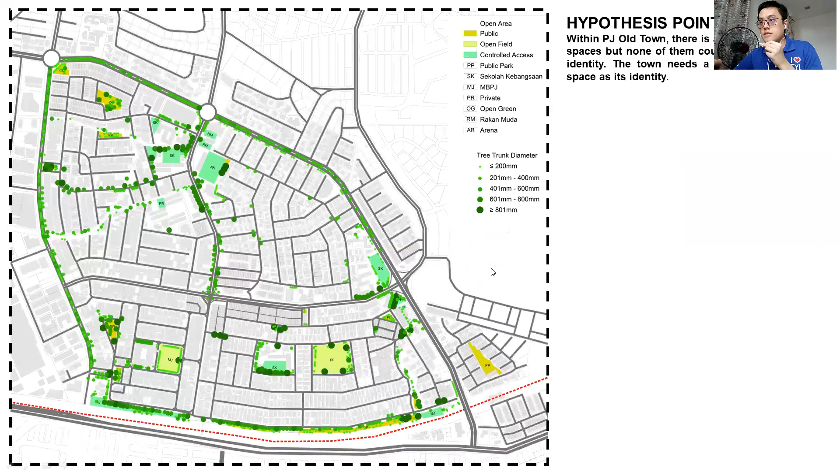This is PJ Old Town, and I'm showing you some of the informal open spaces within Old Town: a hockey field, open field, and school fields. All of these are informal open spaces, but they couldn't identify the town's identity.

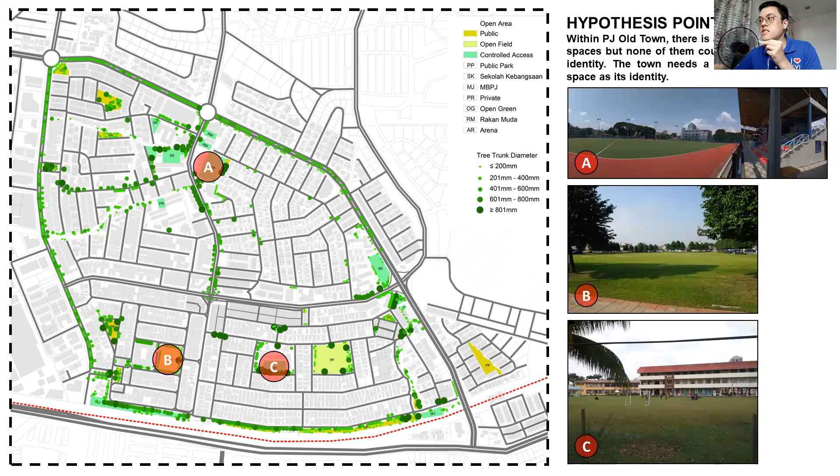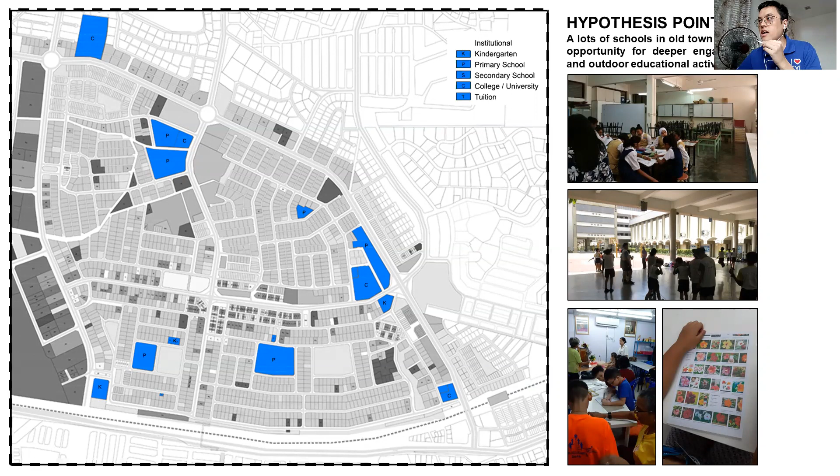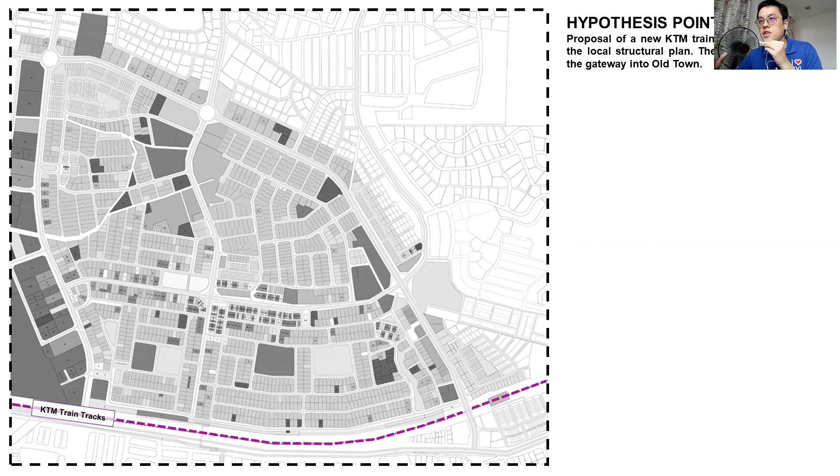Point number 3 is regarding transportation. The southern edge of Old Town is bounded by KTM train tracks, but the closest station, Jalan Templer station, is very far from the town center, and you need to illegally cross the tracks, taking 20 minutes to reach the town center.

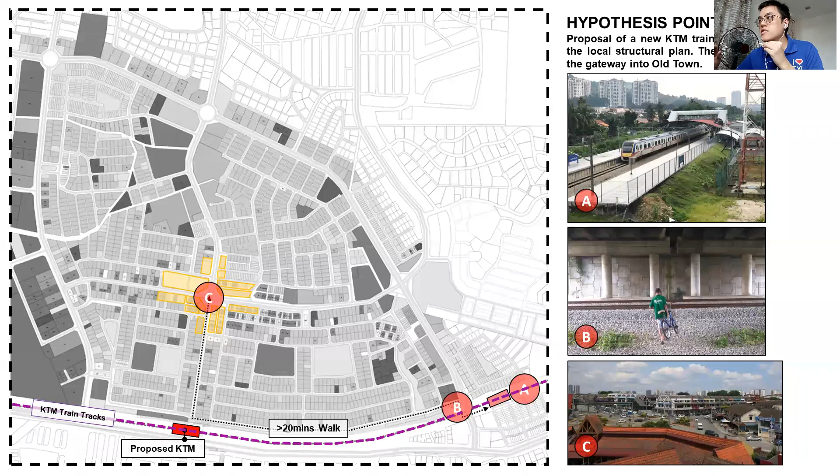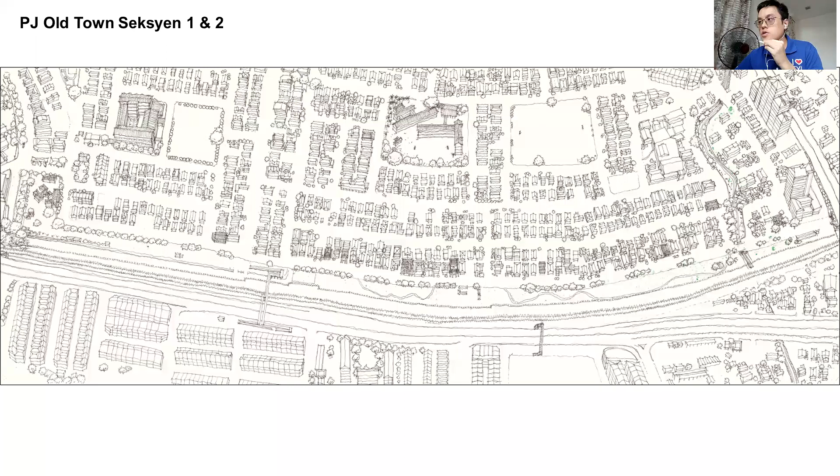That's why, in the local structural plan, there's already a KTM proposal at the center. I'm showing you sections 1 and 2 to illustrate my site, which includes educational institutions, open spaces, transportation, caring homes, and temples.

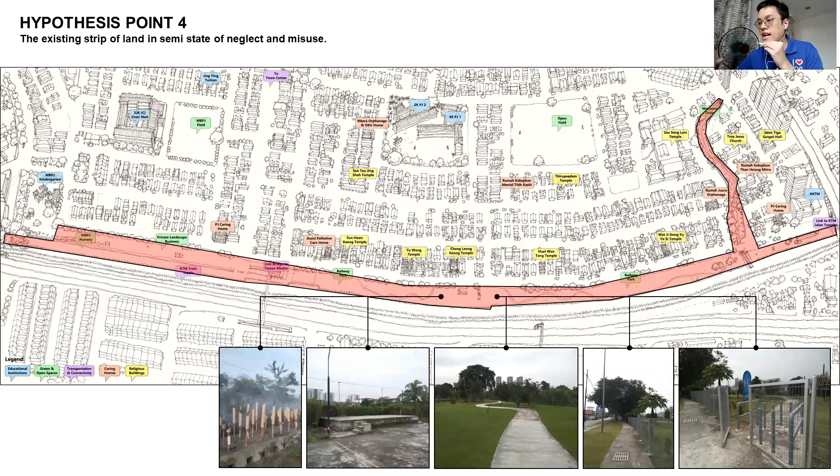Here are some photos of what's happening within the site. The site has been fenced up, and there is religious practice here, along with a minor ponding issue, a link bridge, a Rukun Tetangga cabin, and a monsoon drain. All of these photos show that the existing site is in terrible condition, in a semi-state of neglect and misuse.

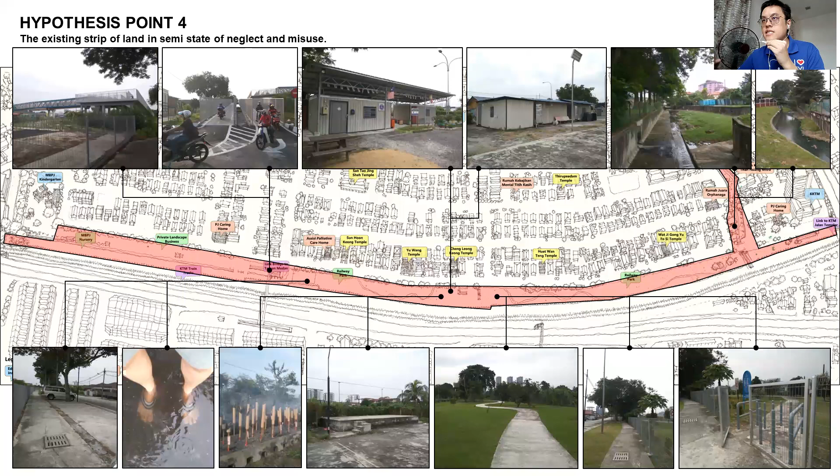All the points I mentioned earlier lead to my thesis proposal: an Old Town Botanic Gardens, a shared commons in service of health, education, transportation, outdoor activity, the immediate community, and neighborhood identity.

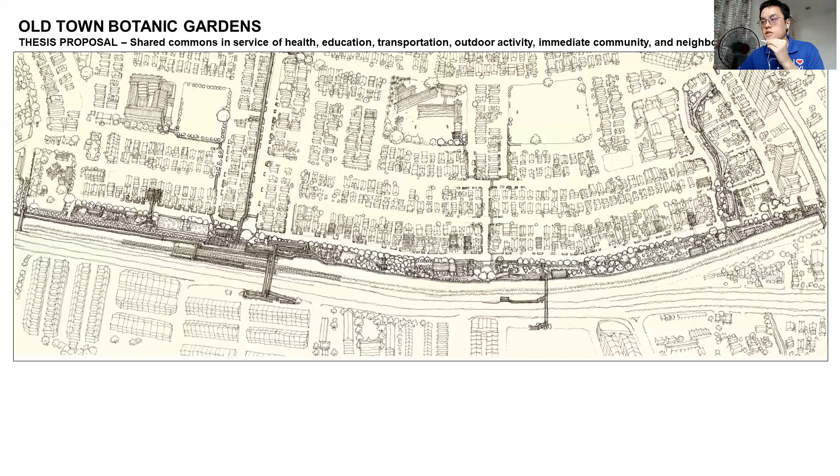Within the proposal, there are various anchor points such as the research center, KTM stations, link bridge, covered hall, community farm, and some supportive commercial activities.

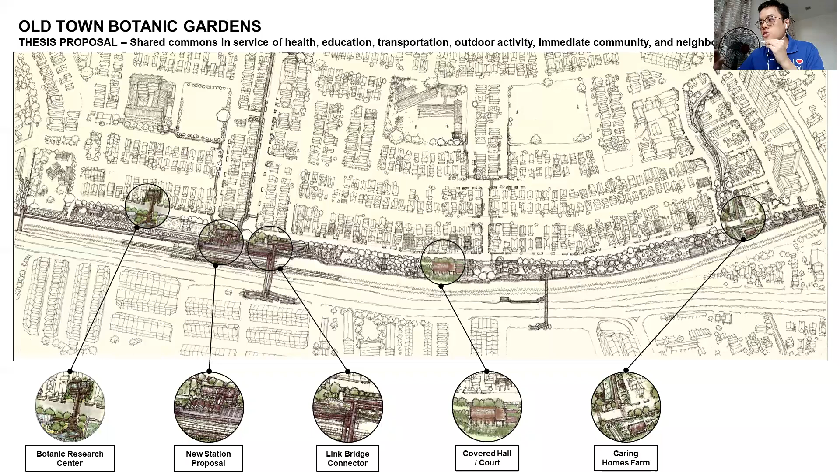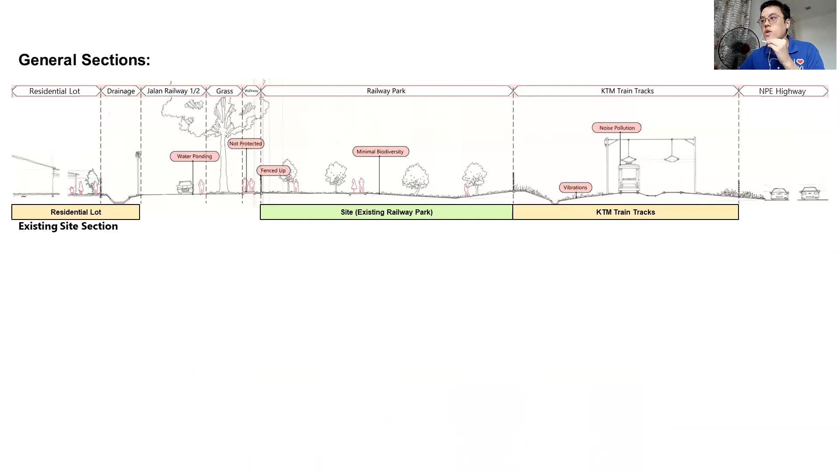Next, I'm showing you the existing site section. The site is currently a railway park, sandwiched between train tracks and a residential lot. And this is the proposed version.

The train tracks produce a lot of noise and vibration, so having gardens in between will become a buffer. This spine will become an edifice, which I'll explain in detail later.

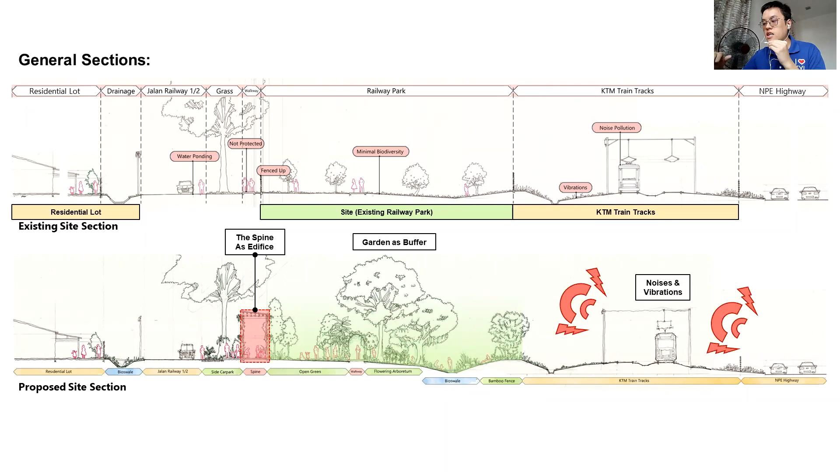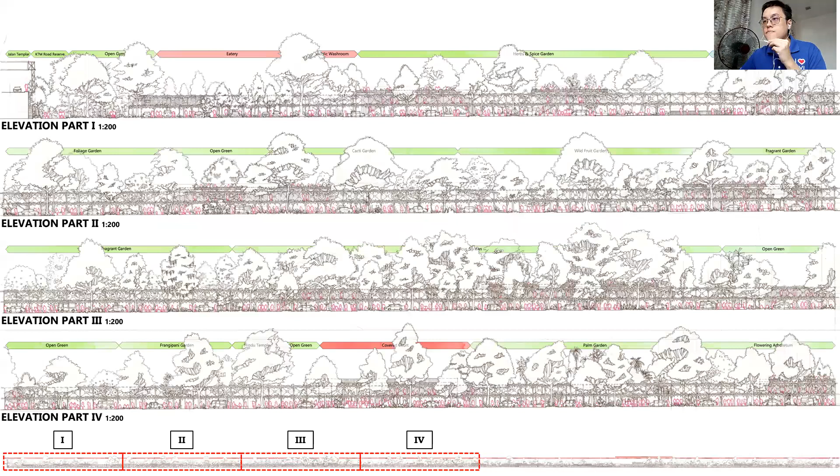This is the overall elevation, which is 1.4 kilometers in length. Taking a closer look, the elevation varies, but the arrays of trees remain the highest, marking the peak of the elevation, along with the other parts of the elevation.

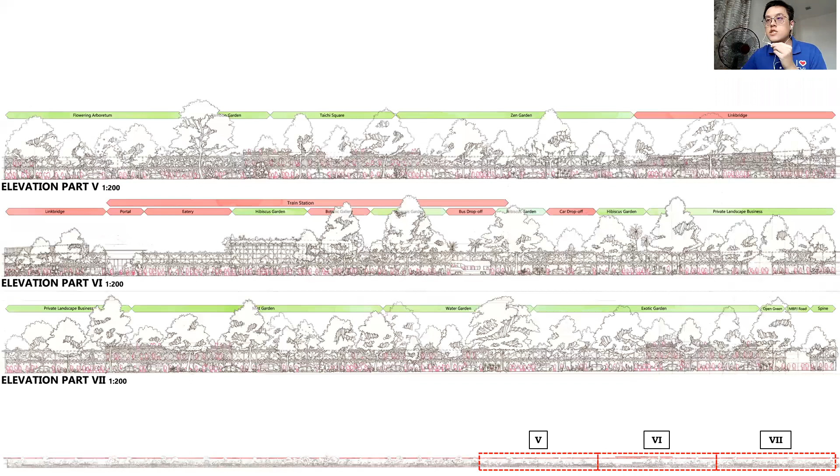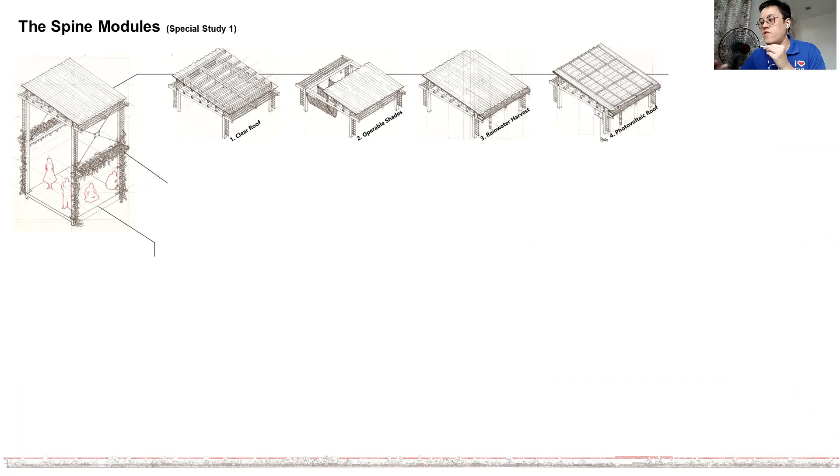Here comes my special study one: the spine modules. The roof can be broken down into 3 parts. First is the roof, with different designs for different functions, such as rainwater harvesting, a photovoltaic roof, and a flat roof.

The middle part is a steel structure that can convert into gardens, exercise equipment, rainwater tanks, and a raised walkway. On the ground level: reading pods, meditation pods, a bicycle station, open gym, vertical connection, and some small businesses, directory boards, washroom, or even botanic labs.

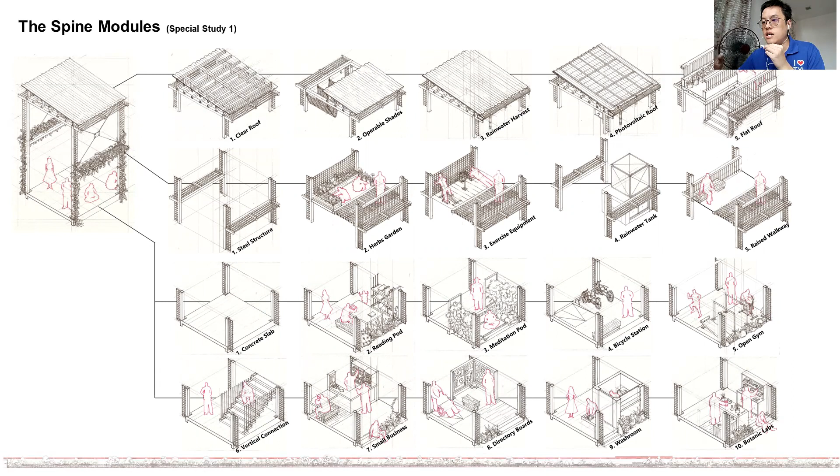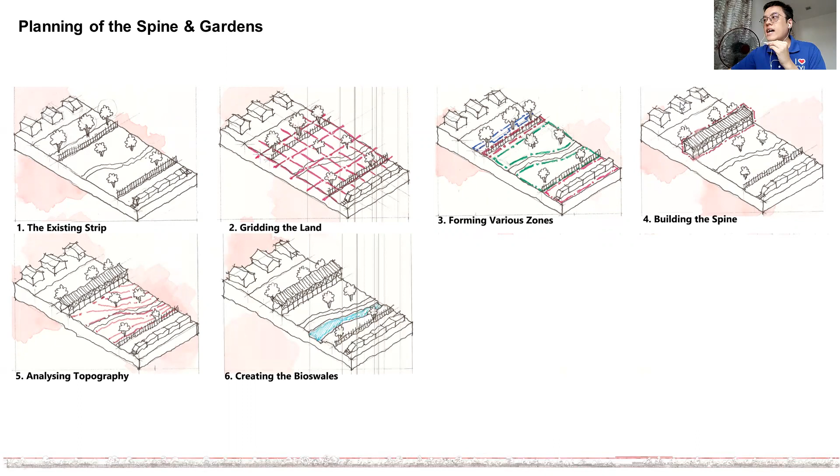Building out the spine starts from the existing strip of land, then gridding the land, zoning, and building up the spine, followed by analyzing the topography to demarcate the bioswales and planting the gardens, and finally it becomes a shared commons for all.

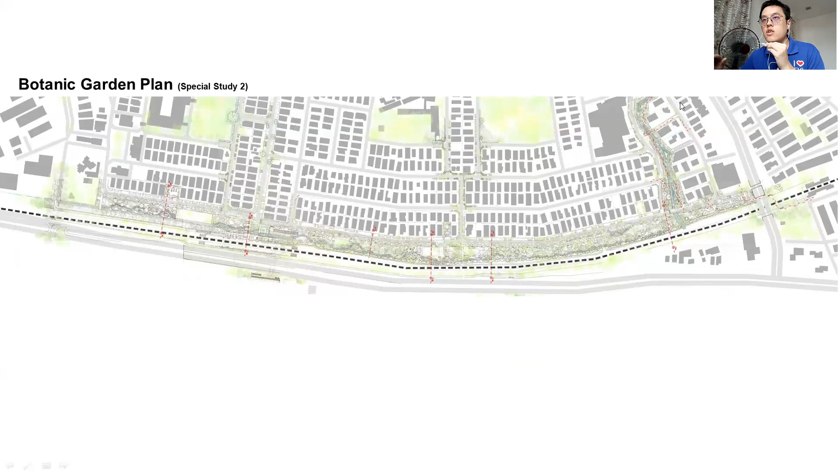I'm showing you the overall plans of the botanic gardens. There is a variety of garden happenings within the whole site, according to the topography and the immediate site context.

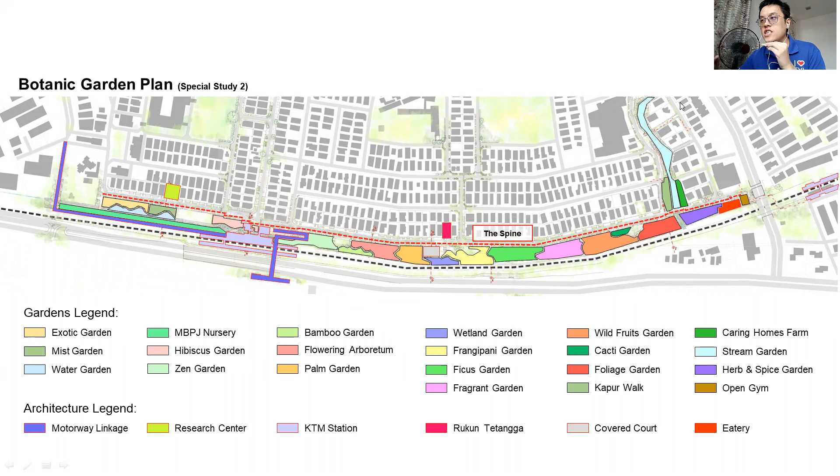The architectural interventions are sandwiched between the gardens. Taking a closer look, all the spaces are connected by the spine.

Taking a closer look into the site, part A is where the station and the research center are located. I'd also like to mention the new motorway linkage directly into Jalan Penchala to ease the traffic conflict at the Jalan Railway and Jalan Pasar junction.

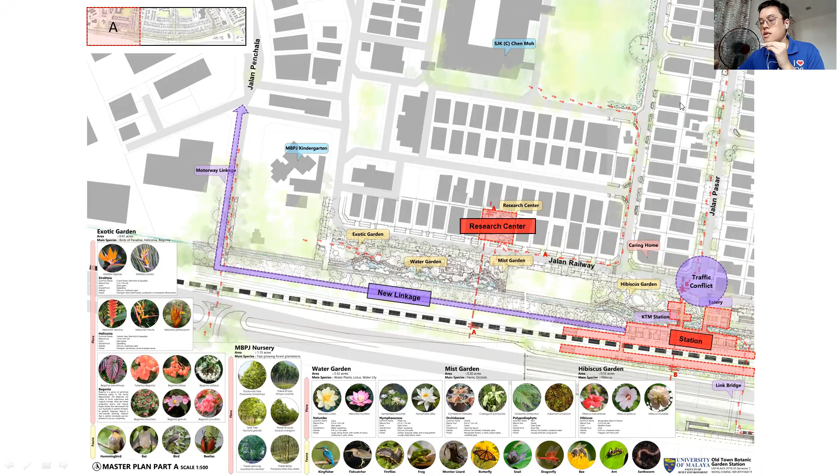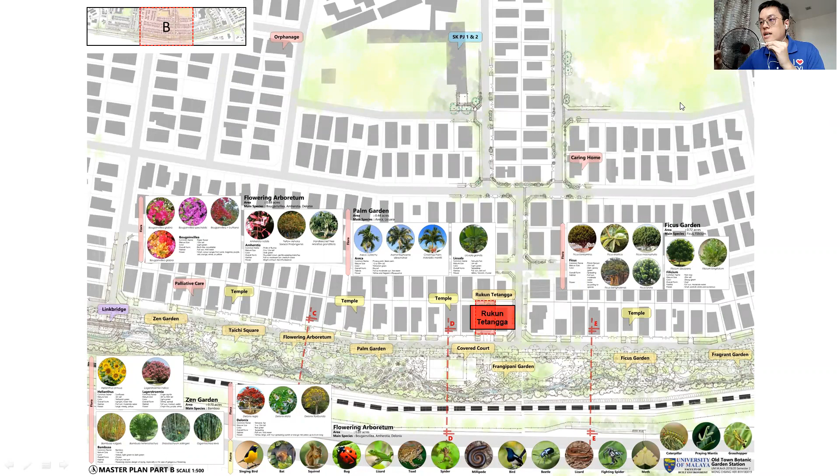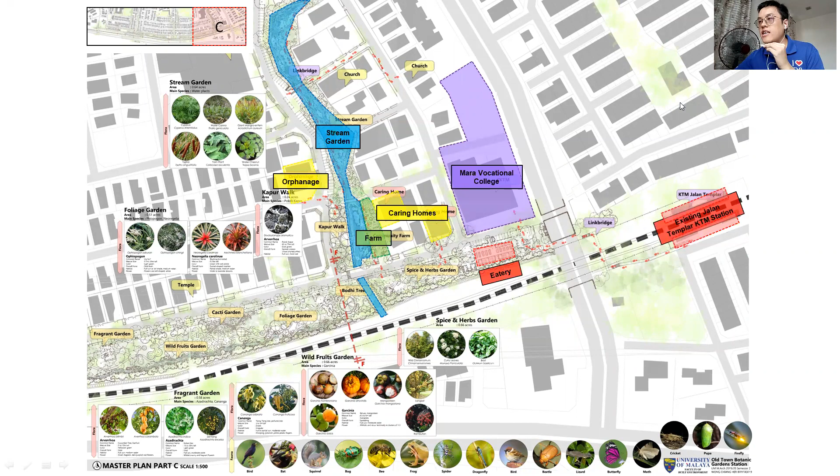Before the water is discharged into the Klang River, it will be filtered. There's also a farm street located here for the orphanage and caring homes, and an eatery for the Mara College, along with the existing temples in the Jalan Templer section. This section shows the largest existing tree on site, the Bodhi tree in the center.

Next, I will go into the station architecture. These are the sketches of some of the ideas I adopted when designing my stations. Next, I will go into the ground floor plan.

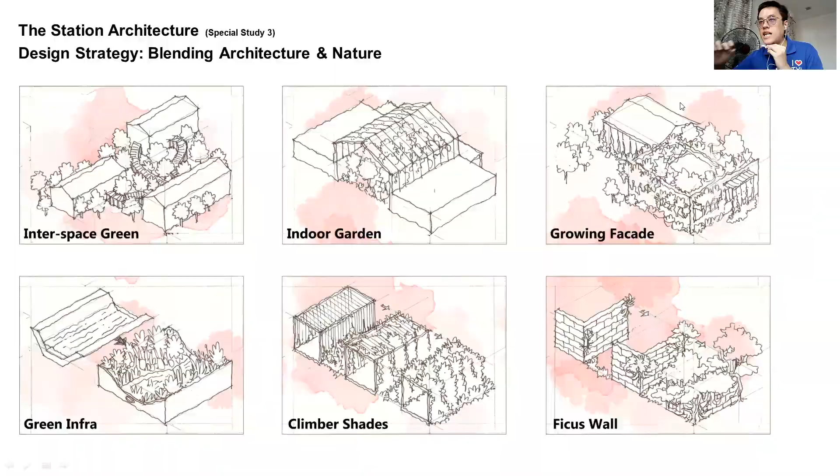What's happening here is I moved the ticketing area out from the station into the garden. So when you are buying a ticket, you will be buying it inside a garden, feeling like you are within a forest, hearing the sound of water and insects. I've also introduced indoor gardens to form a continuous experience of green.

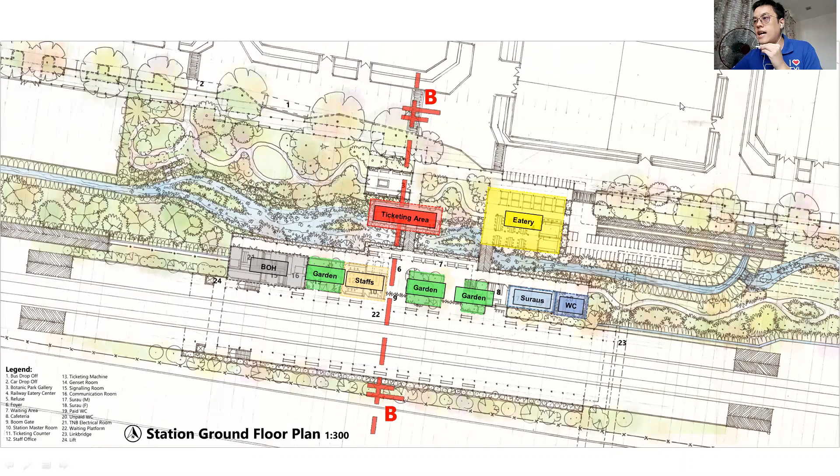Either you are dropped off from the bus station or you are on board from the trains. These are the staff area, an eatery by the roadside, back of house, and some supportive spaces. Now I'm showing you the first floor plan.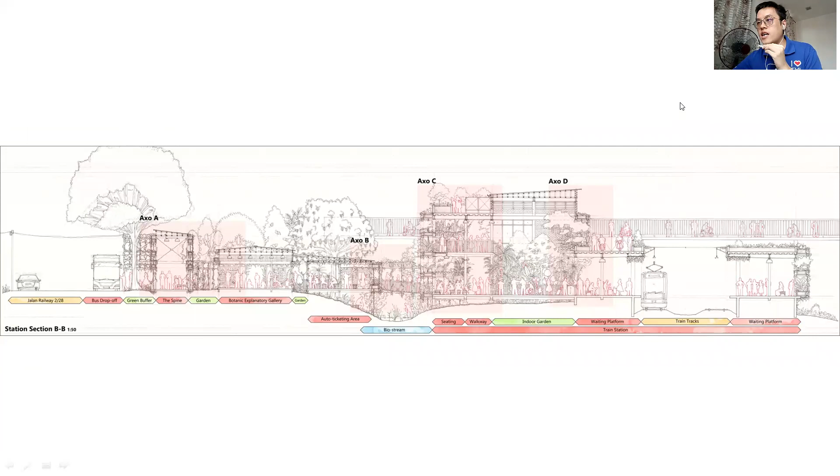Taking a closer look, part A starts with Jalan Railway, followed by the bus drop off. We go through a green buffer, enter the spine and a garden, then a gallery sandwiched between the greens, followed by the auto ticketing area.

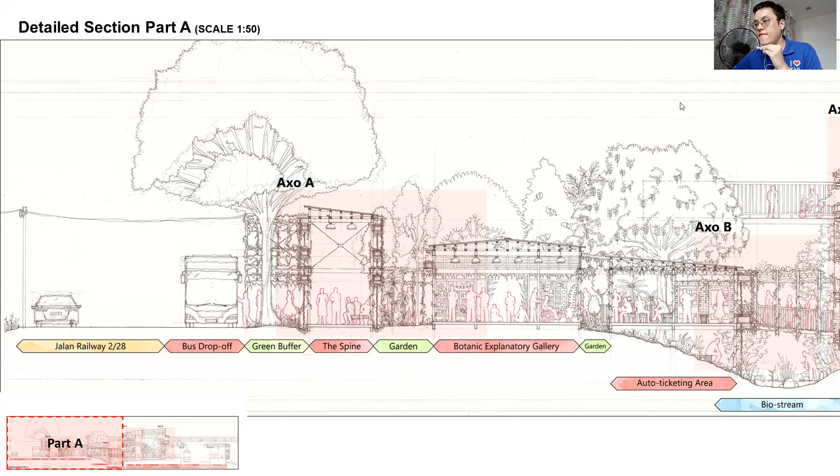And there's a biostream. After you go through the biostream, through a link bridge above, you will reach the station. In the station, there are sitting areas, walkways, indoor gardens, and you will reach the waiting platforms.

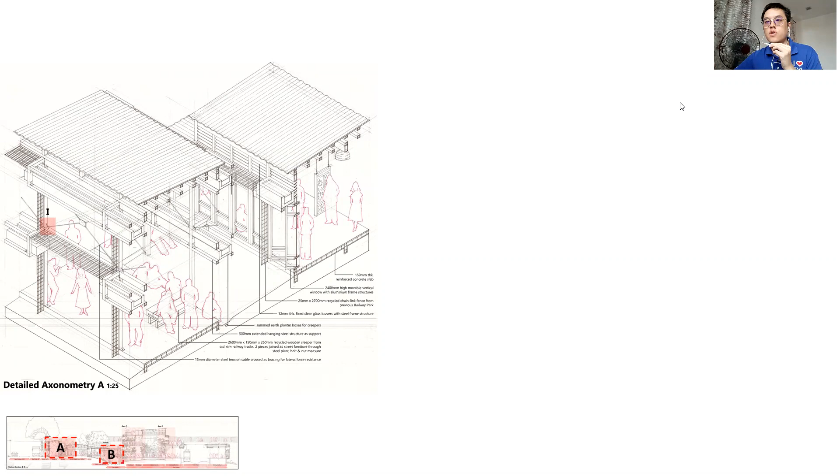Next I'm showing you the axonometry. Axonometry A shows the cut through of the spine and the gallery. B shows the auto ticketing area and the link bridge.

These are the details: the spine joint, the chain link ceiling details, and the steel cable joint.

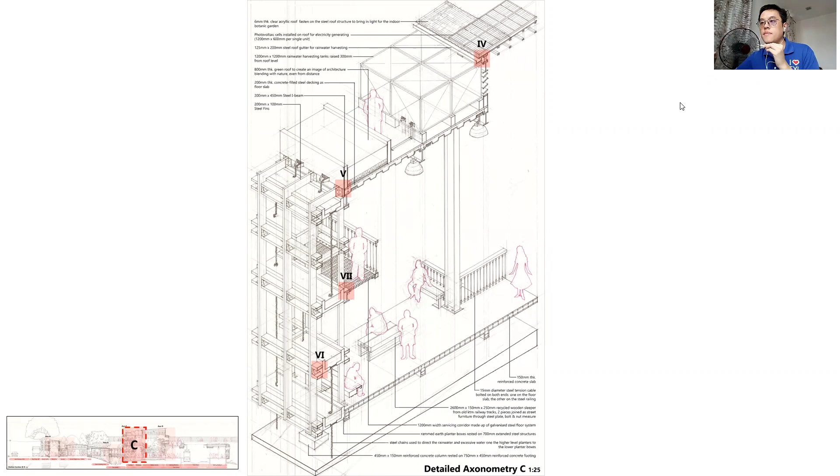Next, axonometry C shows the cut off of the main facade of the station and details like the roof gutter, green roof, and planter frame supported by the steel structure, along with the galvanized steel floor. Lastly, axonometry D shows the acrylic roof, shuttle window, concrete joint, and the recycled sleeper seat.

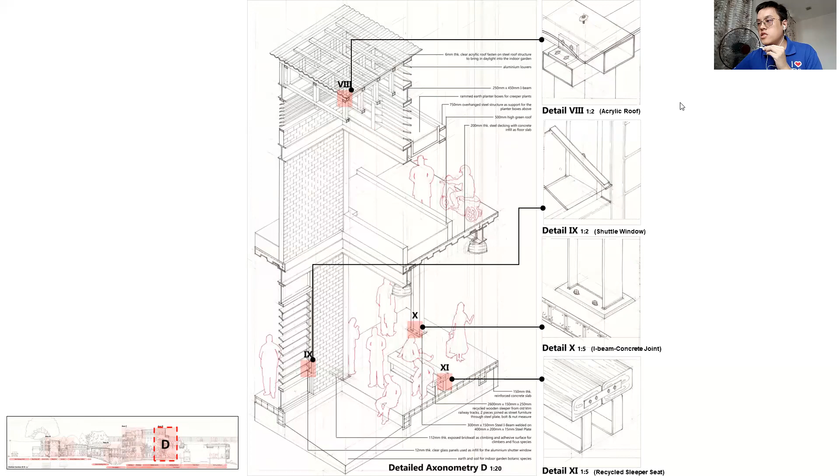Yes, so I will end my slide here. Thank you for listening. Thanks.

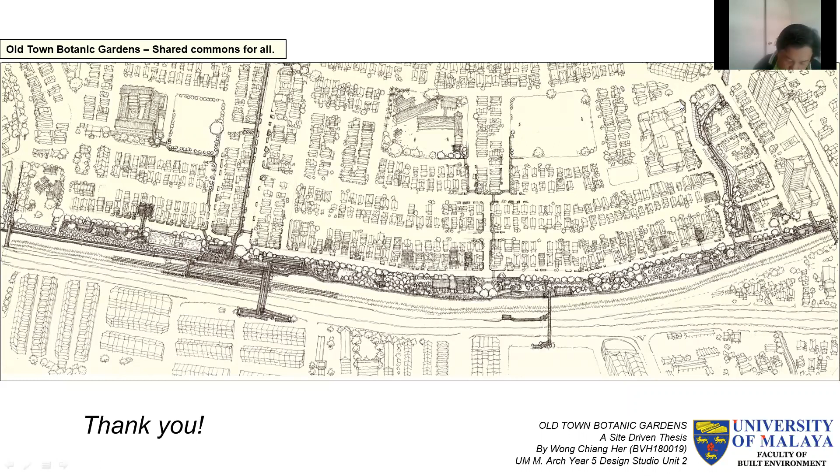I think the progress is where we can see the results of how the whole scheme comes together well. Despite being the smallest in architectural elements, there is a high degree of complexity in the thinking at the detail level, how a single module could morph itself into various aspects relating to the immediate adjacency of the site. The train station has seized the unique quality of the site to capitalize on the experience, how nature comes in, and the exterior actually becomes part of the interior. I have not much to say, but I think to congratulate you on a very successful endeavor.

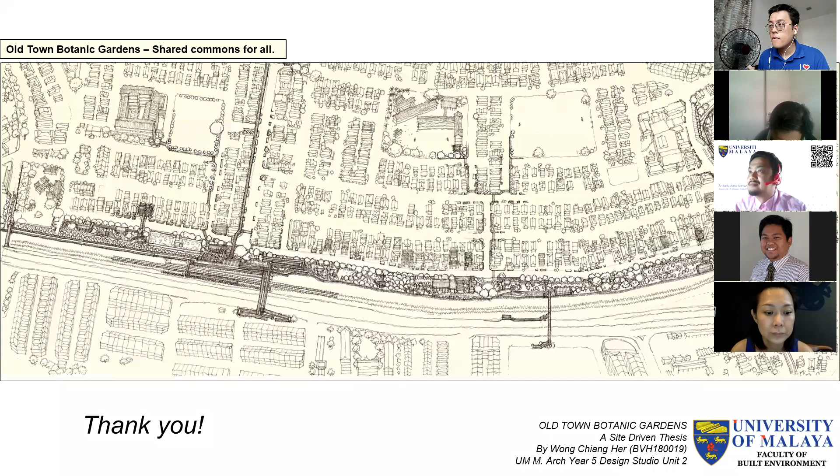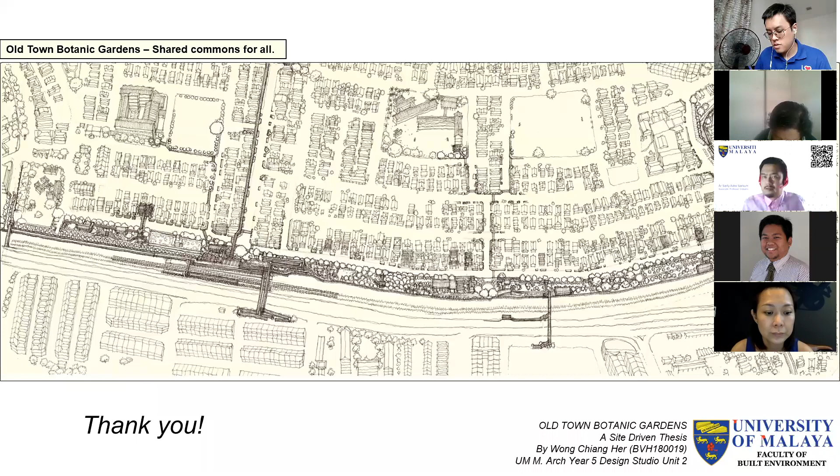Hi Chiang, I just wish, just a suggestion, that perhaps your architectural building could be a bit more bigger, in the sense that this has been quite a trend. This station is also being used to help communities around the area, so they can rent some of the spaces to sell stuff, kind of a small economy where they can generate their own income.

That's number one. Number two, I'm not quite clear on how the traffic flows during peak hours in and around the ground floor, especially the part facing your landscape area. But overall I'm okay with that.

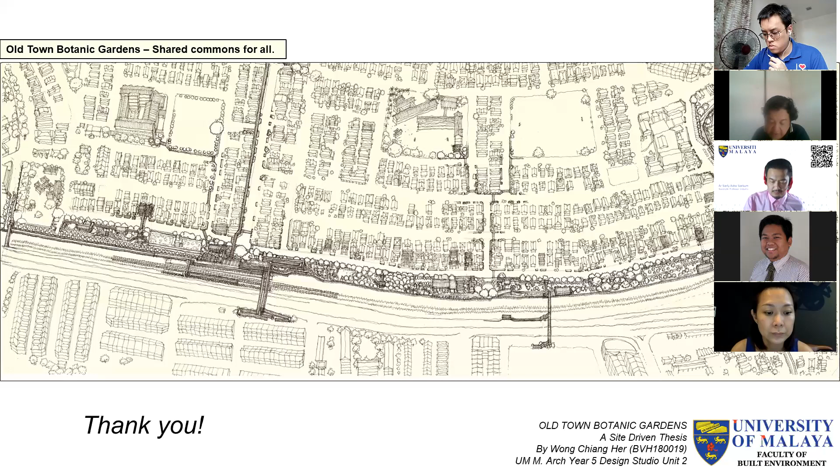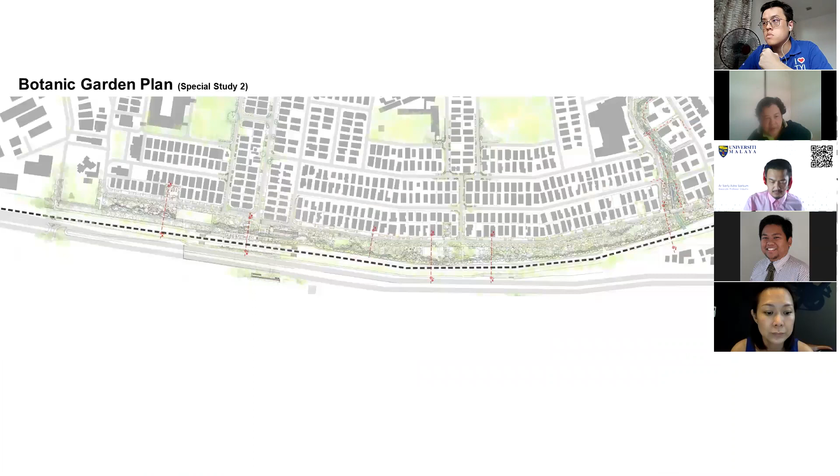Thank you, Sarly. We have about 10 minutes for Chiang to explain, in particular the point Chu Ping mentioned about whether there are night activities, opportunities for multiple use, and regarding the kiosks you mentioned, and the other question regarding Dr. Asrul's suggestion that the railway station could be bigger and have some rental space. But I thought you actually have some commercial and rental space based on what you studied earlier, more horizontally located across.

There are a lot of comments regarding the joints and the construction, not only construction and material but also landscaping, and the idea that your construction and material is to be sympathetic to plants. So maybe you can start replying to those two questions, or ask the external critics to clarify further what they want to ask you.

Go ahead. Actually, for Chu Ping's comment, I haven't done that part yet, but I will expand the exploration for the coming portfolio review.

Thank you, Chu Ping. And for Dr. Asrul's comment, it's actually like the spine - you can see here there's really some options for small businesses. The 3 meter spine, 1.5 meters of it, can actually convert into small businesses, so you can have random spots along the spine, maybe like ice kacang stores or air tebu stores or something like that.

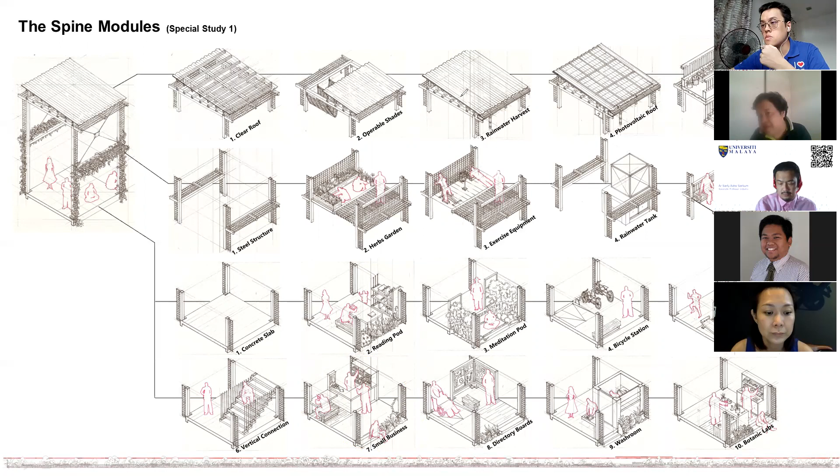But what Dr. Asrul said is that maybe you should also explain what the commercial activities are here, and how you can see these commercial activities - maybe the stalls, the nasi lemak makcik near the corner where she sells to the motorcyclists - where is that particular makcik located, and what stalls are you trying to do specifically?

Those are some of the things that maybe you well and good could just even go to Putrajaya and have a look at what Dr. Asrul is saying regarding the context of Putrajaya and the context of your Petaling Jaya Old Town. What is the context in terms of the old person, whether they can actually also sell their stuff away, because you have that link now between the railway station to the center of town. Maybe some of the congestion in that road could go and be selling their wares, the fruit stall and so on that we know of that street. So maybe you can have a look at that.

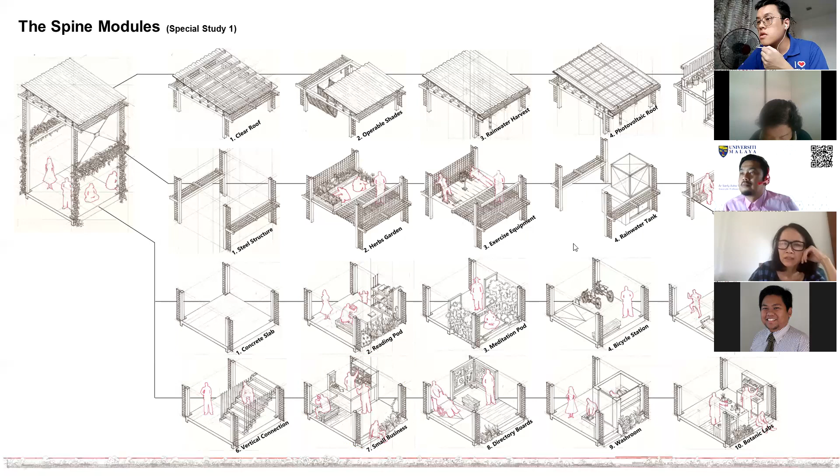All right, and Chiang He, would you like to explain? Do you have anything to explain regarding these topics that we've discussed towards the end? You have a commercial space that you included near the linkway, the last time, the makcik, where the makcik sell nasi lemak. I think it's not explained in that sense. It's near the KTM station, right?

Yeah, so here you can see that the yellow color, which is the eatery, is actually with the intention of keeping it by the roadside. Because when I went to the site, I saw that there's already an existing business there, makcik selling nasi lemak and mee goreng by the roadside. So that's why I put it by the roadside, with motorcycle parking beside it, so that when there are a lot of motors coming from the Taman Merah area from the south, on their way to work, they can buy their breakfast from the makcik there. So I intended to maintain the existing business, so it's happening here.

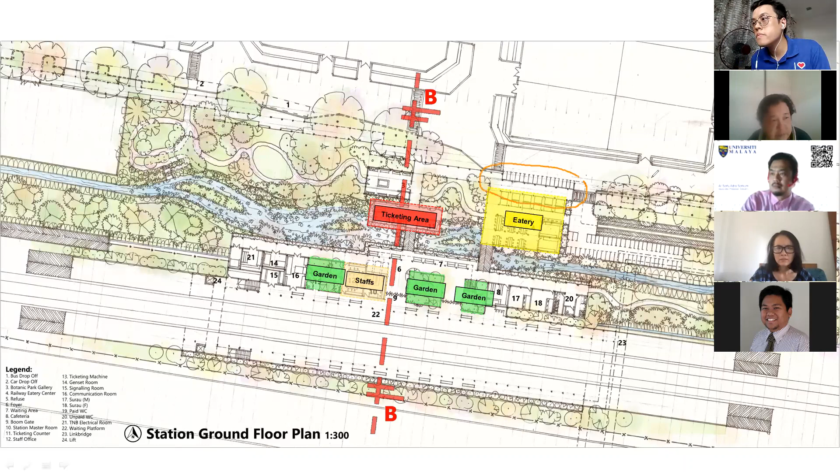Okay, thank you Chiang He. Maybe, to please the department's requirement, you could emphasize more on structure and services details, and possibly even detail out your eatery as well as your railway station further in terms of the roof and how you have rainwater downpipe, and how maybe your rainwater could you calculate that could actually help assist with making your botanic garden, the relationship between the built environment and the nature environment, how water collected on the roof could go into watering the plants. Maybe there are some details in terms of structure and services, and the construction and material could be much more accentuated in terms of solutions regarding human and nature together. So that would be much more impactful regarding what you could provide for in the final boards.

So any other points that the external critic would like to remind Chiang He so that he will be more focused for his portfolio review? Maybe just a minor point.

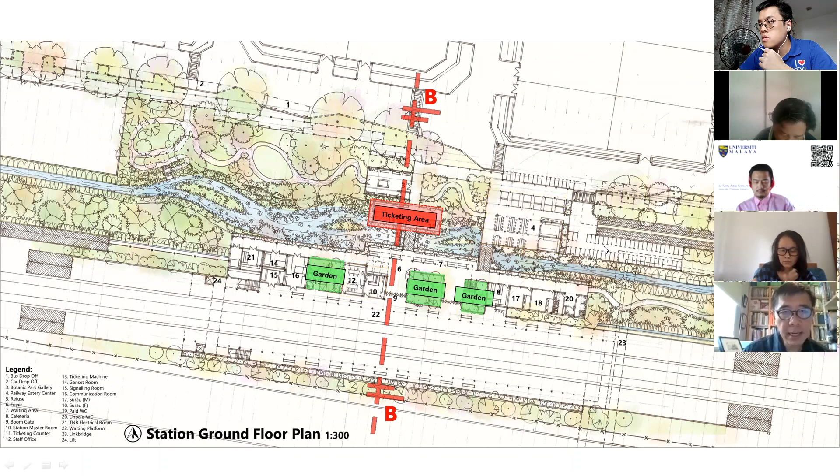I think in your explanation, Chiang He, there's a lot about activities, right? And I'm just wondering if there is something about the biodiversity there that your landscaping and your building itself in a way contribute to. For example, the choice of plants that you put in place, other than being edible, are there choices because it's replacing certain threatened species or increasing certain habitat to attract desirable creatures like butterflies or birds onto the site, which in the past may be there, or maybe they are being threatened, so you are creating a new haven for them. So just wondering whether such thoughts have been integrated into your landscaping as well as your building design, in which while the landscape regenerates, the building plays a part in allowing animals to roost, etc. So just wondering if such thoughts go into your scheme.

Yeah, I'd like to answer that. I did a study on the different kinds of gardens, and they are located according to the plants, the suitability, and according to the site condition, and also the immediate neighborhood. For example, happening here is actually I've proposed these exotic gardens. Here is because of the site condition, which is a longer width compared to the other side of the site. And this part of the site is a more secure side of the overall site plan. And also the water garden is, according to the current monsoon drain, I converted it into a bioswale.

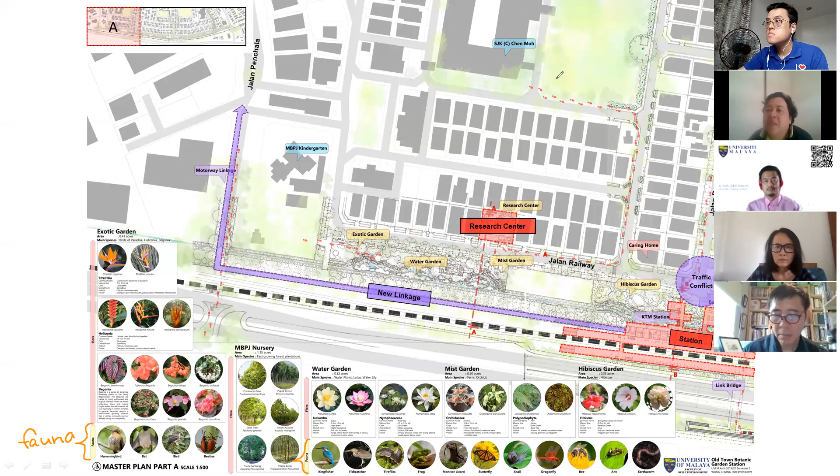All right, thanks. So with that, one minute, anything else? Okay, so thank you very much everyone regarding He's presentation. And now we're coming to, we want...